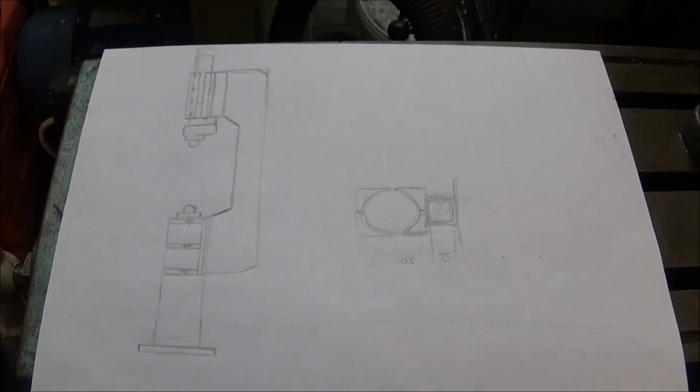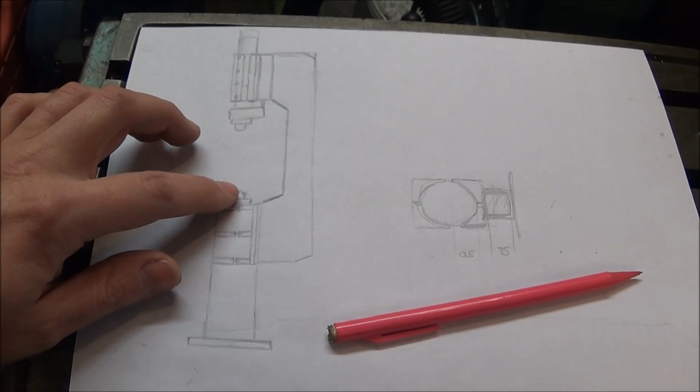Now I fired up the CAD machine and designed the power hammer. So the plan is, this is that large lump of steel you saw earlier, that will be the anvil. This is a steel plate that I had kicking round. This bar here is the other piece of bar you saw. The dies here will be made out of a part of a sledgehammer head. I managed to get a big I-beam off eBay for not a lot of money that I'll profile to make this.

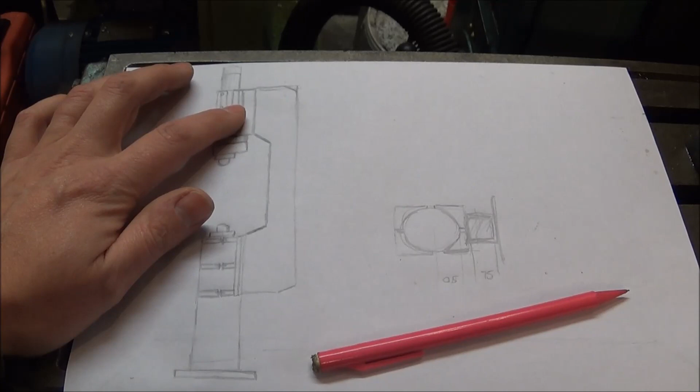And I've decided to make it into an air power hammer or a pneumatic power hammer. So I've looked at Joshua Delisle's video and taken on board some of the bits and pieces that he used, and I've also looked at the Big Blue 110 power hammer and used very similar sized pneumatic equipment to that. So the anvil and the top and the pneumatic ram will be very similar to the Big Blue.

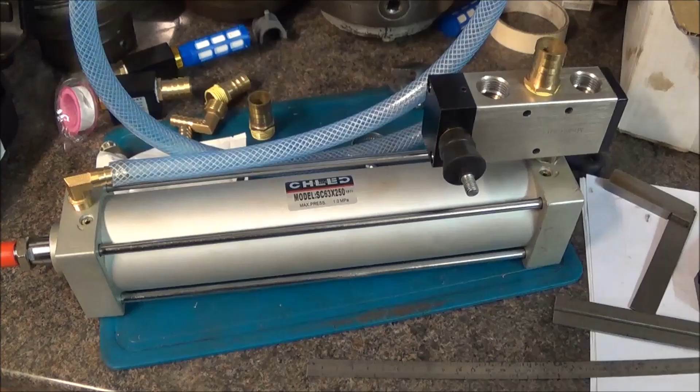So this is the cylinder that Joshua recommended on his power hammer build. It's a 63mm by 250mm stroke length double acting pneumatic ram, and then there's a 5-way valve. So I'm using very similar bits and pieces to what he recommended, and it seems to be a good match for the weight of hammer or top that I'm using.

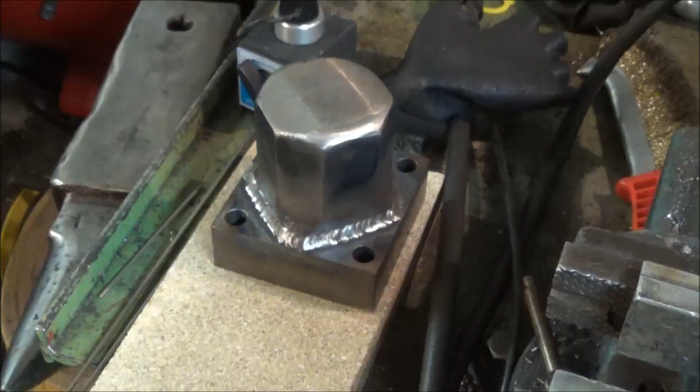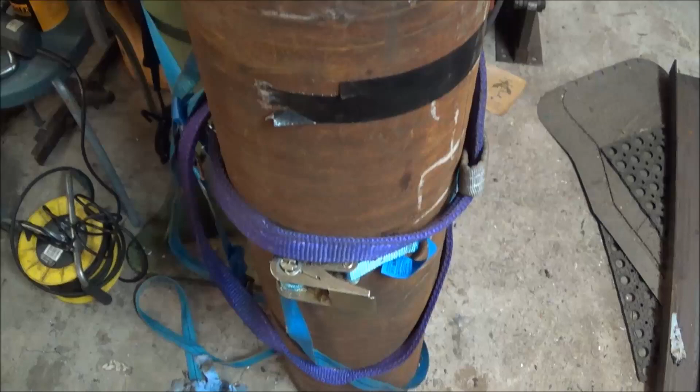The piece of steel that I'm going to use for the anvil weighs about 390 kilos. I think it's just too heavy to put on my machine. I'm not sure I could fit it on there safely anyway. So I'm having to do everything by hand. It's got two saw cut ends. The ends seem to be reasonably true to the outside diameter, so that's good.

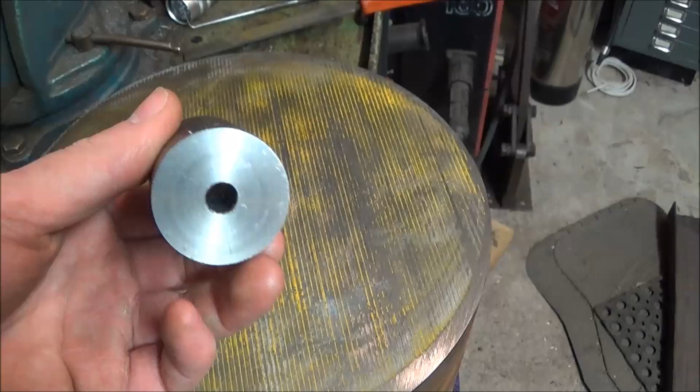So I've just cleaned these up with a file, and then I've created a central hole, which I did just by measuring off from the sides, and I've drilled and tapped that M10. I use this little guide that I made in the lathe to ensure that I was drilling straight, and that will be the marking point, or the holding down point, for my plate that I will drill and then use as a template to drill the rest of the holes.

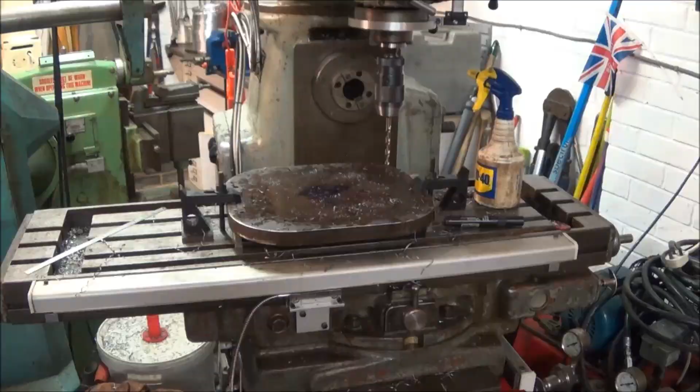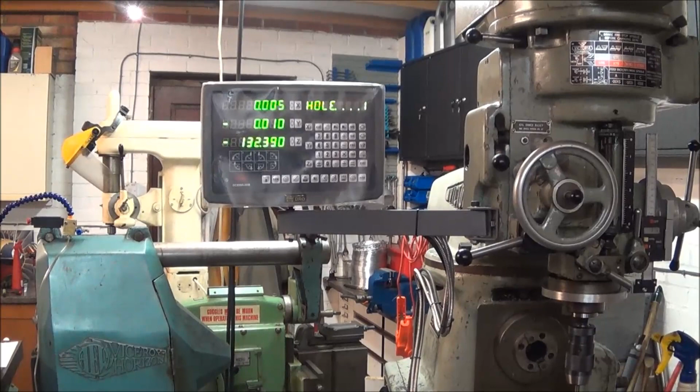The bottom plate was drilled on the milling machine using the DRO, and at the moment I've just punched some 8.5mm holes through it, and I'm going to use those to transfer onto the main column, main anvil. I was using the DRO, just a few things to note. This DRO is really cheap, but it has got some foibles. The first one is you can see that the y-axis isn't on 0. It's a bit susceptible to EMC, so if you turn the switch on this milling machine, occasionally it jumps. I think I need to do something about that, maybe some better shielding.

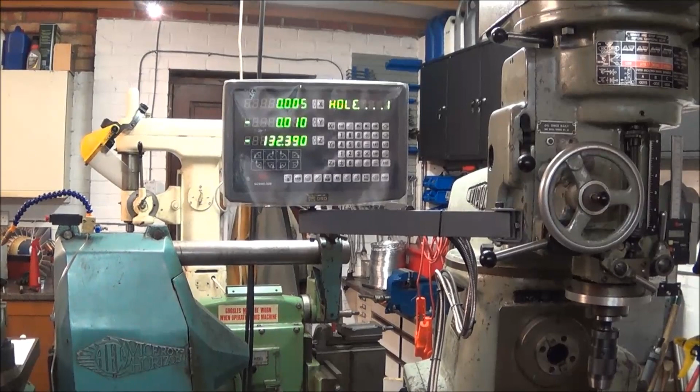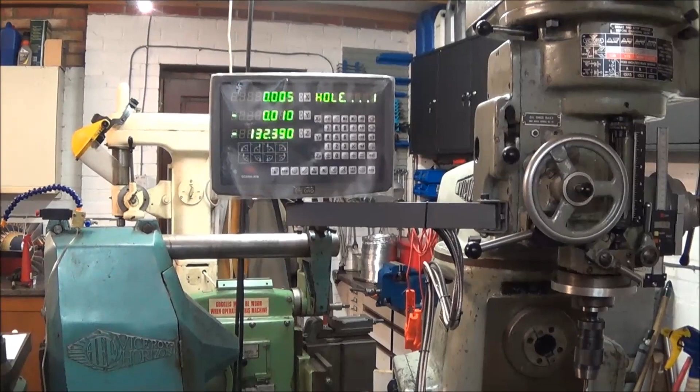The other thing is the DRO function is a bit odd. If you put diameter in, it actually means radius, and if you want 8 holes you need to put 9 in, so it's slightly strange, but as I say, I think the whole DRO kit on this milling machine, which is a reasonable sized milling machine, was less than £200, so I can't really complain too much.

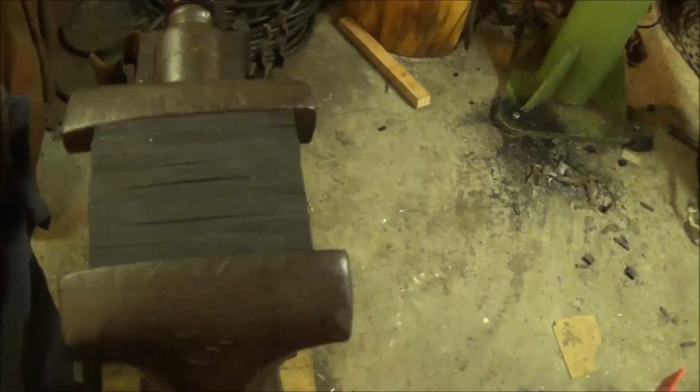This is the power hammer pretty much done, apart from some cleaning, painting and a bit of tidying up of the piping. So I'll just go through some of the features of it that maybe weren't apparent during the build video. So if we start from the bottom, there's the base plate. I'll eventually be mounting that on a big oak platform. You've got the anvil arrangement. Clamped to that is the main backbone of the power hammer.

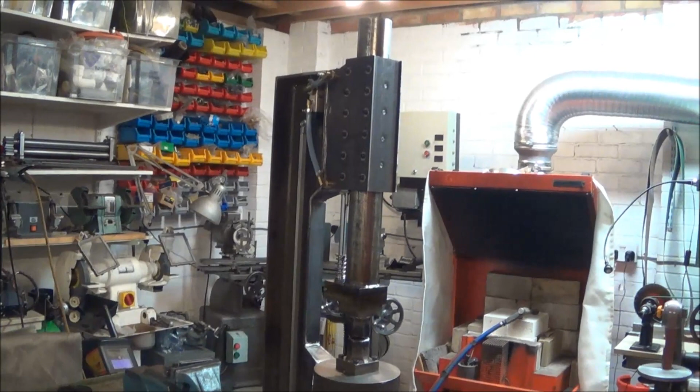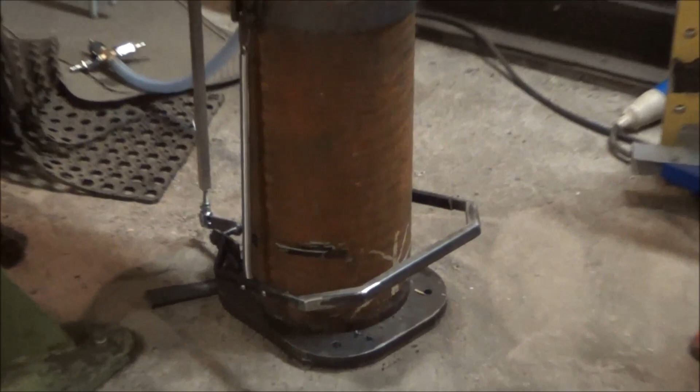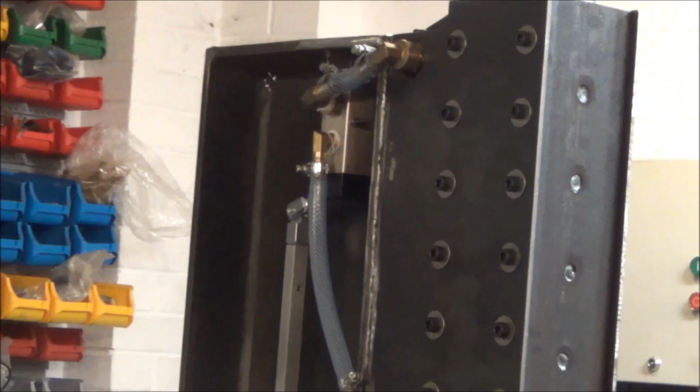And then we have the ram guide at the top. You can see the two ram guides bolted there with the ram and then the pneumatic ram tucked in behind. And then up there is the valve. The valve is actuated by a foot pedal down there. I didn't really cover much of the build of that because it's just basic fabrication. The foot pedal is sprung upwards by those springs, and then there's a rod that goes up the back that when you push the pedal down actuates the valve, and then from the valve there's an air supply to the top of the pneumatic ram and an air supply to the bottom.

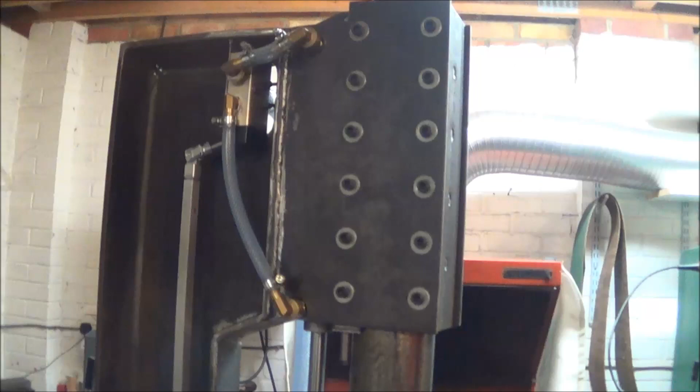Mounted on the anvil and on the ram are those sledgehammer heads, the dies. And you can see you've got the trunnion there with the pin through it on the lower part of the ram, and there's a spring to decelerate the ram as it hits the top. I haven't quite finished it off, but there is where the bump stop will be mounted. When the glue's dried, it'll be fixed to there. And then you can see the screws that align the two ram guides, and these allow the ram to be lined up to the lower die.

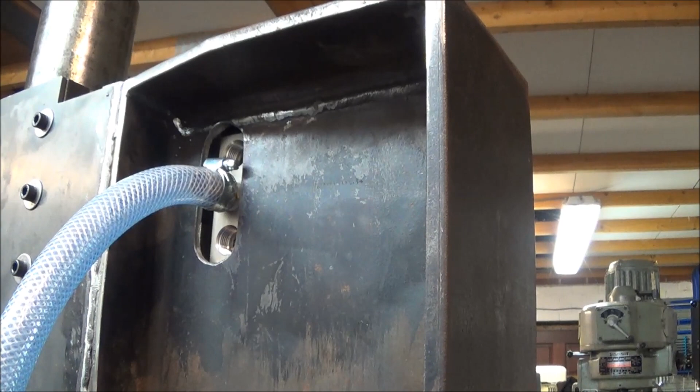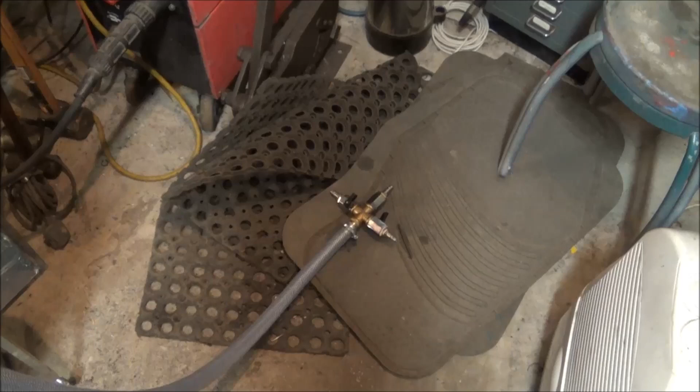On the other side of the hammer we have a temporary rigged up air supply into the other side of the valve, and there are the two outlets. I think eventually I'll put some silencers on there, and then at the end of that pipe we have some three-way inputs. So I have 3 compressors, and depending on how much air we need I can use all 3 in tandem. And here is a view of the foot pedal arrangement mounted on the bottom of the power hammer. You can see there's some adjustment on there for adjusting the setting and the height of that foot pedal.

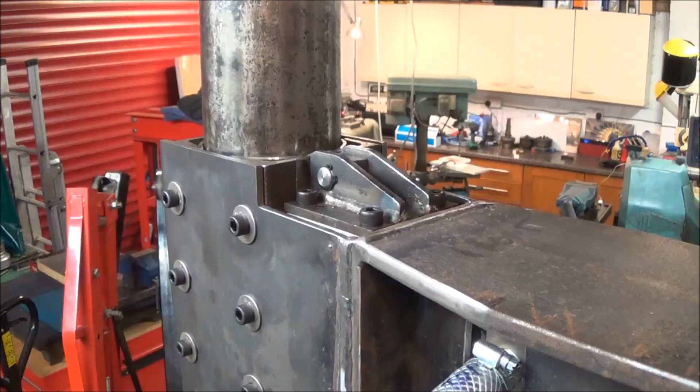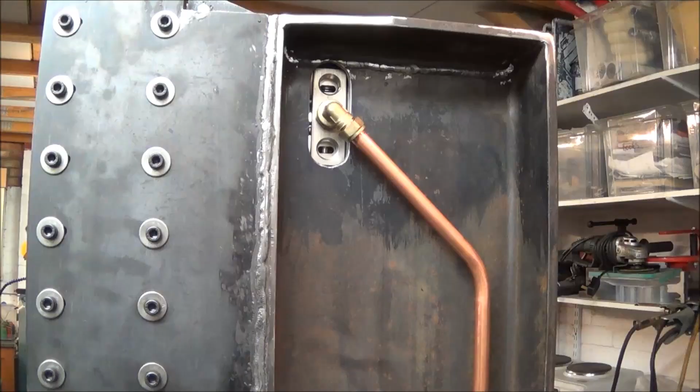So looking at the top of the hammer, you can see the support for the pneumatic ram, and you can see the pivot point there with the snap rings on it. I didn't really show much of the manufacture of that part. And here's an overall view of the hammer. This is with the plumbing done and the bump stop in place. So you can see the supply pipe there and the bump stop. And that 3-way arrangement mounted on the bottom there.